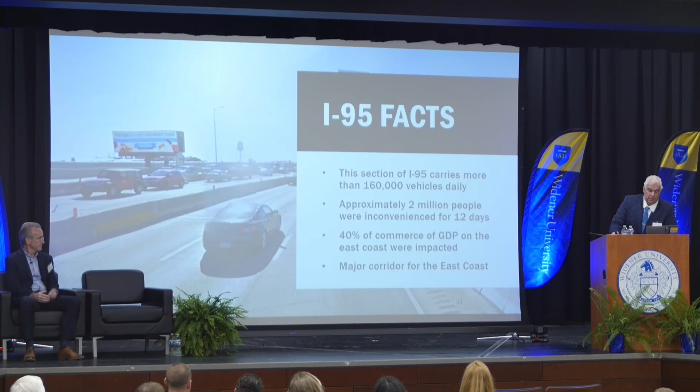So we'll move on to what we have going on. The fact is on I-95, the section we have carries about 160,000 cars a day. It's about 2 million people that were inconvenienced in the 12-day period, about 40%, and that's a sliding scale on the GDP going up the East Coast.

So the interesting part of this was Sunday morning, there was a fuel tanker, 8,500 gallons, lost control on the ramp on Cottman Avenue. Shortly after that, 4 lanes collapsed. I don't want to dwell upon this, but the tragic part of the thing was Nathan Moody, who was a truck driver in there, he did perish in there beyond repair and recognition.

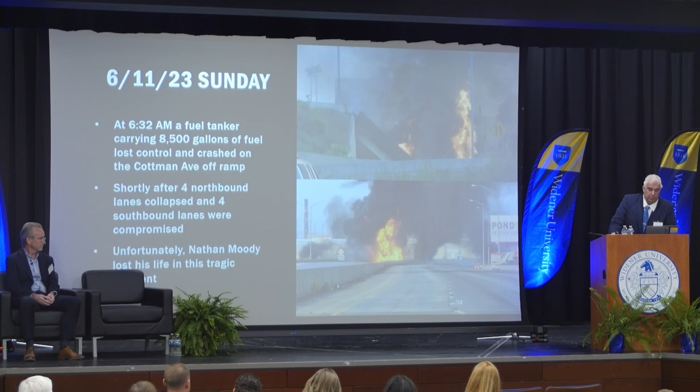I was there right after the fire was starting to settle down a little bit, and that's it. So it gives you an idea of the intensity of the flames that were there, and you couldn't even get near it. And the police department, of course, allowed me to get right in there and try to start figuring this thing out.

Some of the major concerns we had underneath Cottman Avenue, and this is really part of the risk of the job, there's water lines, there's pipes, there's utilities. We bid the job originally and we weren't sure the compressive strength of the material. So basically what we had, you had 8,500 gallons of gasoline that leaked into the sewers, and typically it wouldn't be a problem, but the Baxter water treatment plant actually has drinking water, and they still have combination sewers in Philadelphia, and it was back in the old days, dilution was a solution to pollution.

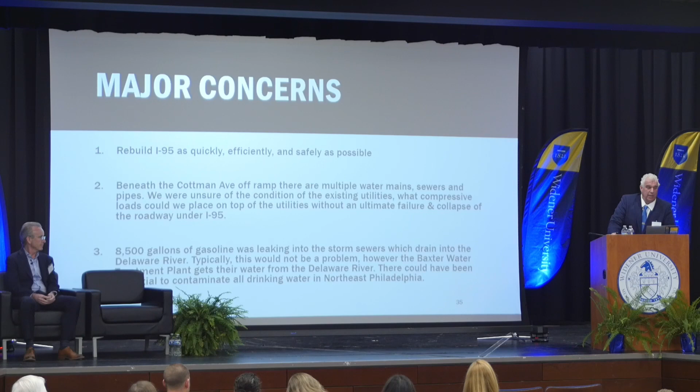That was the saying they always had, so you couldn't figure out what to do with it. Well, dilute it. Yeah, that's fine. Okay, that's great until 8,500 gallons runs out in the river and the drinking water was polluted. So that was some of the concerns we have. There's a few more there. You know, the box culvert, there's terracotta pipes, which is a clay pipe that won't take heat real well, plastic pipes that just straight melt and whatnot. Some of the other concerns we had for the engineers in the group, it was a 57 degree radius.

There was a radius of 3,000 feet, and the beauty of that was we had no drawings, we had no details, we had nothing on what we could have. So those were some of the concerns we had.

We weren't sure about the utilities, weren't sure about the box culvert. The bridge was 57 degrees, 37-degree radius. It's bifurcated, meaning one side is higher than the other. We had to reroute the SEPTA buses, and thank God Leslie Richards from SEPTA jumped in. This was a testament of American spirit where everyone pretty much jumped in.

So there we are, not sure what to do. At 7:45 we got a phone call, and Patty's seen this happen before. I immediately got up, drove to Philadelphia, and had a brief conversation.

Harold Windisch was supposed to be here today, but he ended up with cooties, so he canceled on me. Then Dina Bozzi, one of the other engineers, the structural engineer, had to cover for him, so that's how that worked. The dean was very complimentary the way she phrased it, but I'll tell you the truth.

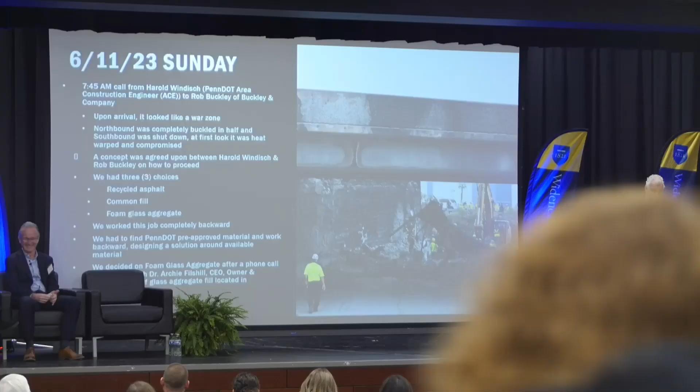So the discussion came up. We actually had a choice of three materials. It was recycled asphalt that we knew was in the area, or foam aggregate lightweight, which weighs about 20 pounds a cubic foot rather than 120, which would be your standard dirt. So that's the decision that was made.

We had everything figured out by about 9 o'clock in the morning. Archie, not having much of a life either, picked up the phone on Sunday morning and said here's what we can do.

So when we get to this, all you engineers pay attention. We had mechanical drawing, and Professor Coe would have a heart attack on the next picture. We had to roll our pencils, and computers weren't really good. We had key punch cards. We had to use Fortran 4, which was a huge waste of time, and Cobol, another waste of time language. But you can look it up in ancient history. You guys really get bored - I'm available in cassette or 8-track in case you can't sleep tonight.

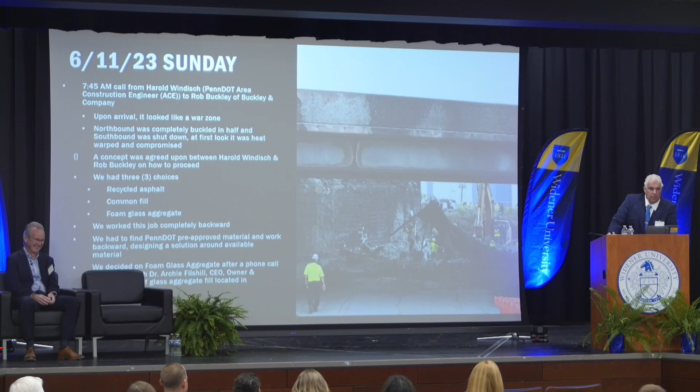We can really get technical with this, but we came up with a plan, and it had to be done quick, it had to be accurate, it had to be safe. So there it is - there was the plan.

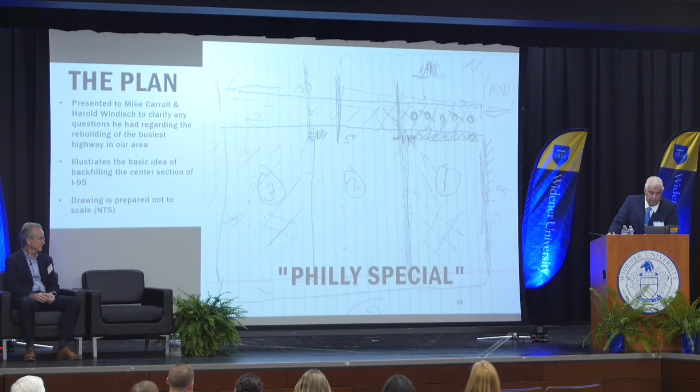I know what you're thinking now - it's one of my better drawings, I'll be honest. But that was done in the first hour of the decision, and I explained that to the Secretary of Transportation, Mike Carroll. One thing I have to note, it's a Philly special - kind of a football thing. I was lucky enough to be the quarterback on this team, so we dubbed it the Philly special. Just for the engineering teachers and professors, it's not to scale, in case there's any question - I just throw that in there.

Our solution, obviously, we had to detour, come up with a plan - safe, accurate, well thought out. 160,000 cars were affected. We also got a call from the emergency management team, the state police - Jerry McVeigh, Greg Reale, and the fire department, Tony Hudgens. They're all friends, we've worked with them for 30, 40 years, which always made it interesting. The Coast Guard jumped right on the boom to try to get the gasoline under control. We also backfilled the center part, temporary three lanes northbound, which we were allowed to restrict. And we used the lightweight material because of the compressive strength, which was the gamble.

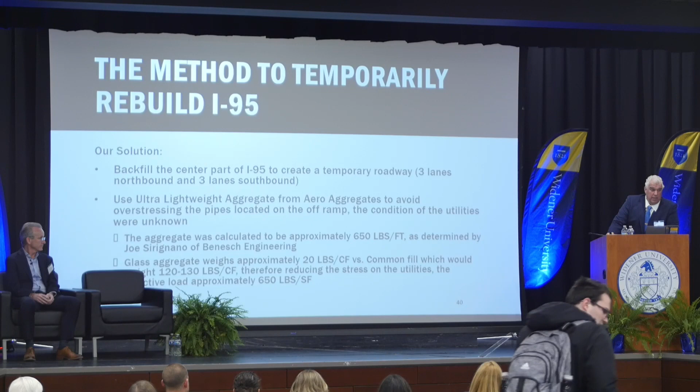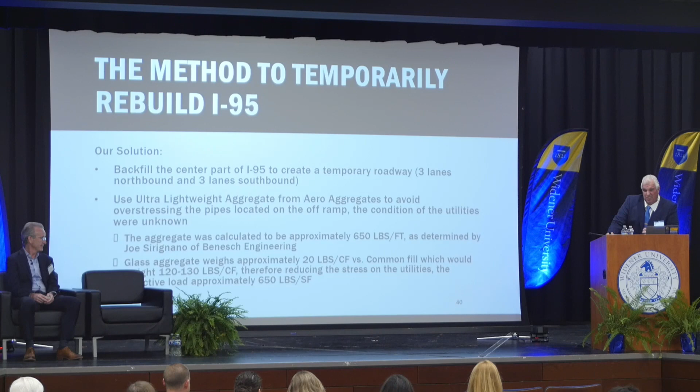Now here's the other part that's interesting. As a contractor, you have to be very careful when you go out there - of course you indemnify everyone and hold everyone harmless. If you haven't taken any business law classes, I strongly recommend you pay attention to that, and they'll explain what that means. But that's the risk you take when you take these jobs on. If it had not worked, I probably wouldn't be here - I'd be in jail. A couple short stints there, nothing really long, so it's really not bad. But anyway, that's another story.

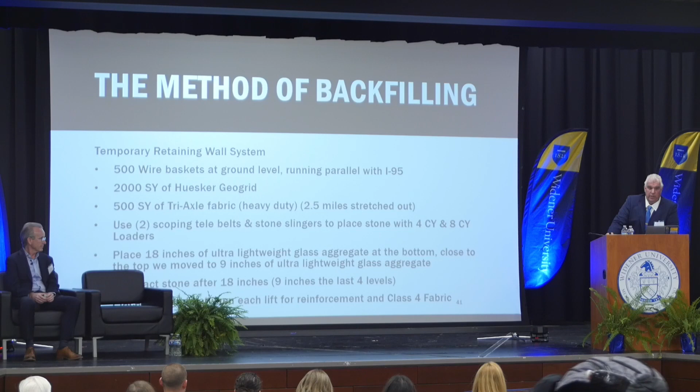Okay, we had some methods of backfilling. We used 500 wire baskets, 2,000 feet of high-strength fabric, which in total was about 2.5 miles. And thank God Archie was there because he took the obligation and responsibility on the design with Snobble Engineering. That was like a weight lifted off me tremendously, and I do appreciate that, because at that time you don't really know who your friends are until you get into those types of situations, and I was very fortunate - I cashed in a lot of favors. Sunday morning, you're telling the designers who usually tell us what to do.

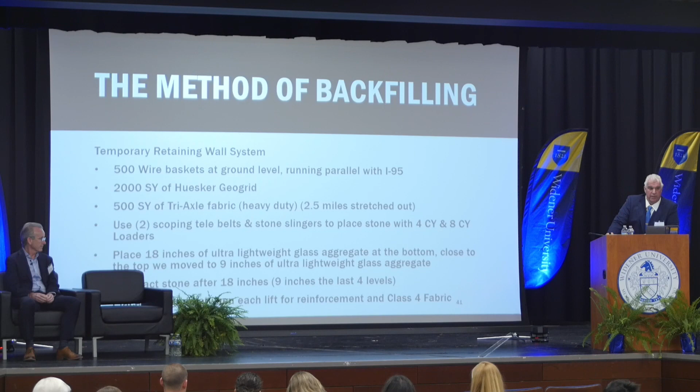By the way, I only need to design—take all the time you want, but you have till tomorrow morning or you're fired. So that's always fun as a contractor telling the engineer what to do.

At the time it was 8 o'clock in the morning, this is Sunday. This is a timeline of what was happening. By 9 o'clock we had a game plan with that wonderful design, and Abbonizio was on the project. Peter Abbonizio made a deal—he could take it down, it was half down anyway, so I figured it's not a big deal, let's see what he can do.

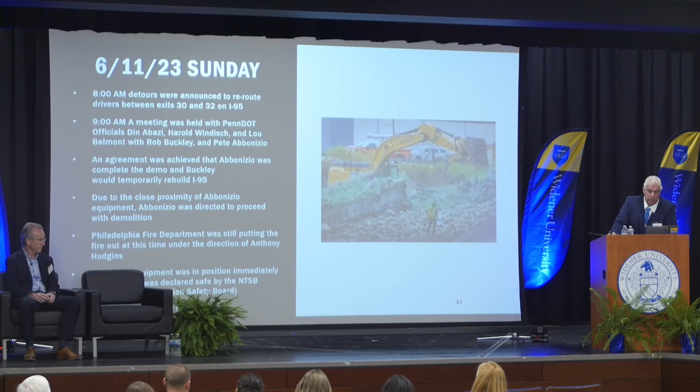So in 6 days he got it down and removed, and allowed us to coordinate on what we had to do. Monday morning, we have...

Governor Shapiro—I'll be honest, it was a very awkward conversation when he asked who I voted for. I tried to dance around it a little. I said, 'I voted for the winner.' He said, 'Bullshit, what did you do?' I said, 'Okay, well, I didn't vote for any of you, and I'm going to tell you why.' In retrospect, we became very good friends.

So now I call him Governor Superhero, not Shapiro. He's done everything, and they got it done as quick as they could. But he was saying it's going to take 3 months—the experts told him it would take 3 months. So we had a couple of discussions about that.

Mike Carroll is also the Secretary of Transportation. When I met Mike Carroll the first time, he banged on my window and said, 'I'm Mike Carroll, Secretary of Transportation.' I said, 'Mike, nice to meet you.' About a half hour later he came back, banged on the window again, and said, 'I'm Mike Carroll, Secretary of Transportation.' I said, 'Yeah, I heard you the first time, I'm not deaf.' But as it turns out, he became a real good friend.

He said, 'I'm not going to leave you.' Normally I'd say, I'll get with your photo op in a minute, thinking it's a photo op—but no, it was the real deal. He was very helpful, he didn't leave. So I have a lot of respect for those guys. They were with us the whole time on that project, and this is part of the political pressure we'll get into in a little bit.

The next day we also got a visit from Pete Buttigieg, and Secretary Shailen Bhatt, who's actually in charge of all the highway work across Pennsylvania, along with Mike Carroll, who also never left the site.

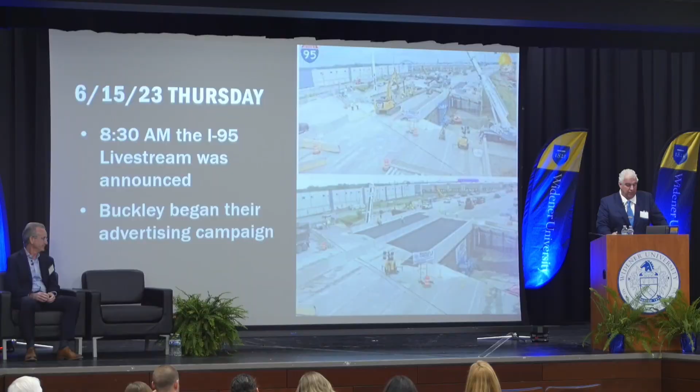Then around 8:30, he said we're going to have a livestream. What the hell's a livestream? We wanted no part of this. I'm thinking, my God, half my guys are criminals, half come from all different backgrounds—how are we going to put this up? I don't want them showing different body parts or doing things. So I said okay, he said we're going to do that, and I said alright, if you're going to do that, I'm going to put up a sign. That was our first campaign that we actually started—maybe you saw it, maybe you didn't, but it was a lot of fun.

I guess next we're going to get into Archie, and let's talk about some ultra lightweight fill and what actually happened during that period of time. Thanks, alright.

Thanks. So as you can probably tell, Rob's a really difficult guy to work with, get along with, and cooperate with. But I've had the pleasure before this project of working with Rob on a couple of projects.

Can you explain why 95 collapsed in the first place? Will you get to that? So he showed a picture. It was a tanker truck that came down Cottman Avenue full of 8,500 gallons of gasoline and couldn't make the turn, was going too fast, and hit the abutment and ignited. So the entire tanker truck lit on fire and literally melted the beams that were supporting northbound 95, and that's what caused the collapse.

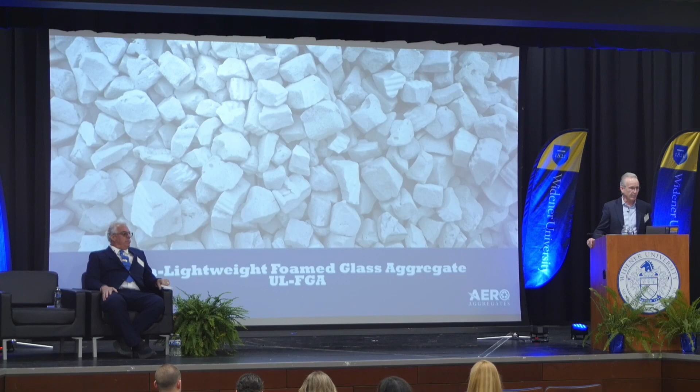What I would say was, when I first met Rob was right after we started Aero Aggregates, and I think what I learned about Rob even before 95 was someone that's always thinking outside the box. What's the easiest way, best way to skin a cat? What's the most optimal way to do it? So I had the benefit of working with Rob on Chestnut Street and on Montgomery Avenue, but like Rob said, I got a call probably around 8:30 in the morning from Rob saying, hey, we have an issue here. We think your material could be the way to go.

The double-edged sword for us was Governor Shapiro came out and made this announcement with Rob that we're going to use this brand new material, which was great in one respect that we got the recognition, but the downside was everybody thought this was the first time this product was ever going to be used, not knowing the history that it's been used in Europe for almost 30 years. And because they said it was recycled glass, a lot of the public thought we were going to stack up broken bottles and drive over it. As Rob knows, as Rob says many a time, they went to the experts at Wawa to ask them their opinion. And it was, you know, a lot of, I'm not going to drive on it first. So there was a lot of interesting PR before things got going.

So this is the material. It's an ultra lightweight aggregate. It's been in use mostly in Europe for about 30 plus years, and it's made all from 100% recycled glass. So at Aero, we take the glass that nobody wants, that would otherwise go to landfill. These are broken up bottles, mayonnaise jars, beer bottles. We crush it into a powder, convert it through a heating process, and expand it with air bubbles, closed cell bubbles. And we do it right down the road in Eddystone, right in the old Baldwin Locomotive Works, the first plant in the US.

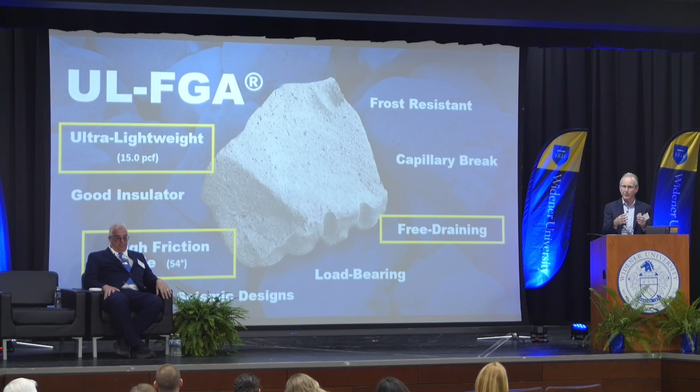But on the I-95 job, these were kind of the 3 properties that really came into play, and it's what we promote about the material, but all 3 of these came into play. Ultra lightweight because of the concern of those underground utilities, the free draining, the stormwater system where they were going to build the wall was going to be underneath the wall. So the wall itself had to be able to pass water through the wall to get down into the stormwater system. And then this high friction angle, which gave it the ability to stand almost vertical.

And then the other thing we talk about is the speed of installation. Normally when you're placing soils or fills, it's going in an 8-inch lift. You have to roll it, compact it. You need optimum weather - if it rains, you have to let it dry out, if it's too dry, you have to wet it. And with foam glass, it avoids all of that. It goes in 3 times thicker lift thickness and in any weather, even during torrential downpours.

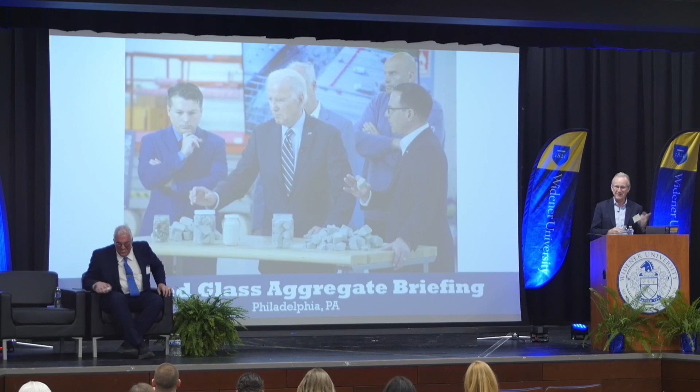As Rob said also, this did get international attention to the point that I got a call to attend a briefing with the governor and the president about what is this new material that we're going to put I-95 on. So I called Rob, we got a briefing. Rob said, you go, I'm not going, to make sure they don't come to the job site. I said, you don't want to meet the president? He says, no, not right now. He said, my fear is if the president shows up, the job's going to be shut down all day between Secret Service and security. I'm going to lose a whole day's production.

You go down, you do the talk, and just keep them off the job site. So I got to go down to a hangar at Philly Airport and give a brief overview of what the material is. This was not the first use. If you're from the region, we've got a lot of material under aprons at Philly Airport, the on-ramp at Girard Avenue. So there's a lot of local projects that have been in place for multiple years, but without anyone really knowing because no one really knew about the material.

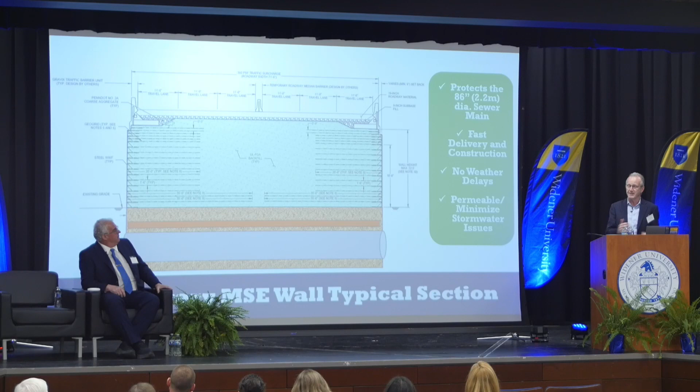So with that, part of Rob's loose leaf drawing, which was literally the drawing they used day one, we converted it into this. And when we heard about the job, we knew this was going to be the fix. We had just done something very similar at JFK Airport, not as an emergency, but as a temporary ramp with the same type of cross section.

So that's why I was able to say to Rob, what do you think? If you want, we can take this whole thing, we'll get the engineer that did this last job, we'll turn it around really quickly, and we'll take care of all the geosynthetics and everything else. And Rob had a lot of other things on his plate at the time, so he said, good, you take this. So that's how it got started.

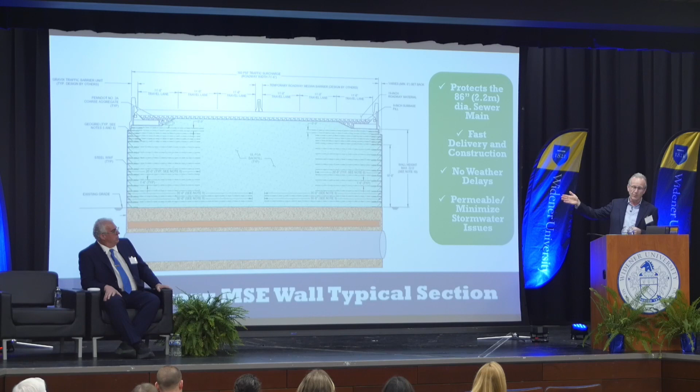And the idea was, we use a high-strength geogrid that you see here, so we can build the material vertical, and this is going to be the roadway for 95. The whole idea is that this 20 feet of fill was going to be 85% lighter than if they used regular fill to protect the sewer and the water line that was below it.

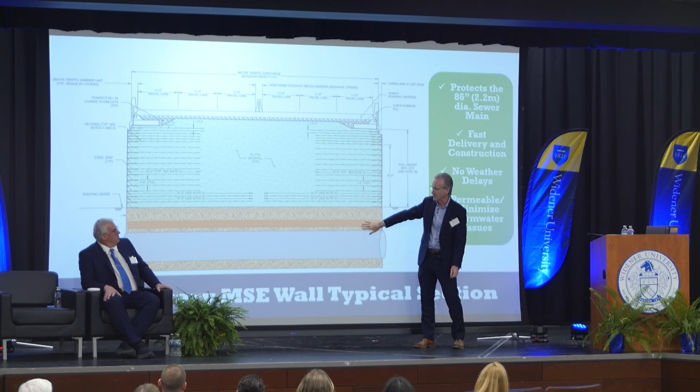The other benefit that we had, because the material is so lightweight, we can put almost 100 cubic yards in a tractor trailer without maxing out the weight of the truck, as opposed to a dump truck, which holds about 14 cubic yards.

So on this project, in these types of trucks - 95's closed because of the accident, so the Secretary of DOT asked Rob, what's your biggest concern is how are we going to get this aggregate from Eddystone to the job site because 95's closed? Well, with Rob's relationships, we got trooper escorts to escort our trucks up the soft shoulder to get to the job site. We were also able to show them that with 90 truckloads of the ultra lightweight, it replaced the equivalent of over 600 dump trucks trying to make the same route because of that added volume.

We also found this to be the best staging area we've ever had to drop off our material because it was literally on northbound 95.

The next part of this was, and Rob will get into the details of how he managed to do this, but we were working basically down in between the two bridge abutments to bring up the fill. And here you can see the layer of the geogrid being placed, which acts as the reinforcement.

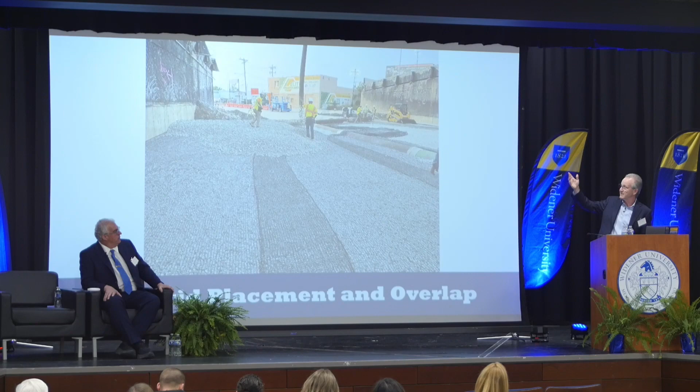So every 18 inches, we put a layer of reinforcement and build up the foam glass. And they use this, basically a concrete conveyor with a chute on it. Let me mute this so it doesn't go loud. But just to give you an idea.

So they were able to take the chute, and the material's light enough it could convey down, and they would place an 18-inch lift with the chute and then come back and compact that with a piece of equipment afterwards.

So the other thing that was kind of remarkable about this, from my viewpoint - I've been in the construction field as an engineer and as a contractor for over 30 years - and Rob touched upon, I'm sure he'll talk more about it, maybe the best example of cooperation and teamwork that I've ever seen on any project.

Everybody knew it was an emergency. Rob mobilized, I think you called in every chip you probably knew. Everybody chipped in, contractors that had nothing to do with the project, asking how can we help, what do you need? The welded wire baskets that we use, we borrowed from another contractor because we needed them immediately, and replaced them later.

When Rob tells you they talked about a 3 to 6 month time period to build this, the thing a lot of people miss is they talked about this being reconstructed in 12 days. 6 days was before Rob got there, done by the other contractor. The rebuild for our portion with the foam glass was done in 3 days, which sets a record for the amount of material placed and compacted. Of all the construction companies I've worked with, Rob, his brother Will, they worked 14, 16, 18 hours a day. If they weren't directing, they were working. Look at the pictures, Rob's on the plate tamper. He put the Secretary of DOT to work, saying 'grab some grid, pull it out.' Nobody was left sitting around not knowing what to do.

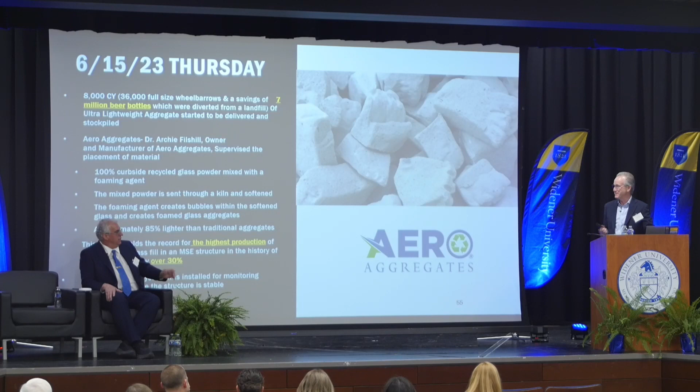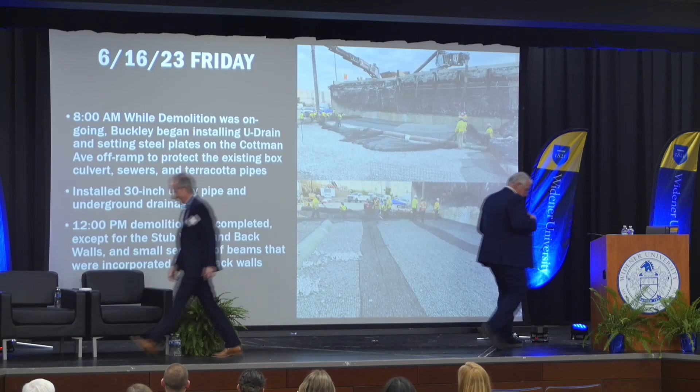Go ahead, I'll turn this back to you. No, I'll turn it back to you because you're going to get into Friday. Okay, here we go, my turn. Thank you. All right, that Archie's something else, that guy's as smooth as glass. I just figured I'd let you know. So anyway, we get into... well, he's not done. Don't clap, he's not done, but no.

And when we started placing it, my God did it rain. It just rained and rained and rained, never let up for a while. One thing we learned with Archie's material is it's actually 20 pounds to the cubic foot. You don't realize, there goes the material floating all over the place, and now they say the wall's failing. So we went down to Wawa and asked them, is the wall failing? Of course they said no, so we continued to place it. But putting this stuff in the rain is really one of the advantages we have, because we could have never gotten this otherwise. You're looking at soil density, compaction, and optimal moisture, always playing with is it too wet, is it too dry. You don't have the room, you don't have that with this material.

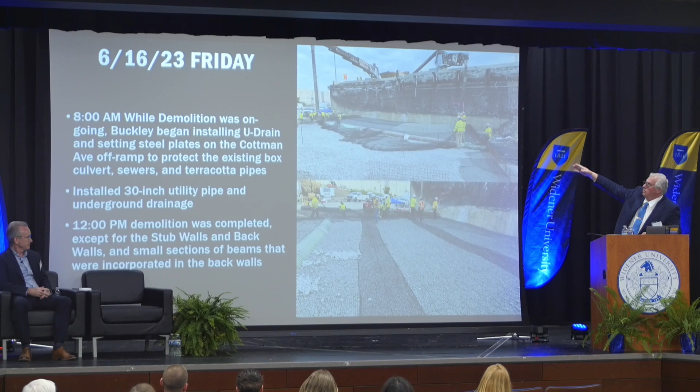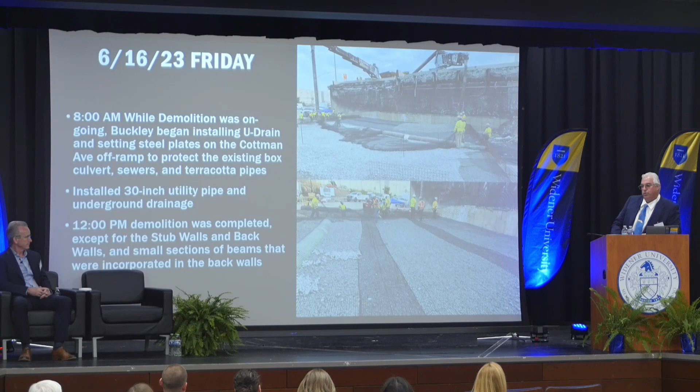It's hard to see in this picture, but you can see it's 57 degrees skewed. We weren't sure of the condition of the abutments. They were burnt, so we were trying to take cores as we went up. We weren't sure if they were going to fail. We had to get the line right, with this skew, when you're on a radius, we narrowed up the lanes to 11 foot, so we weren't even sure if we got the geometry right. And we did this with a 40-year-old theodolite and string lines. So a lot of it had to do just with experience on what we had over the years. We didn't have GPS, we didn't have any of that, so it's kind of good that coming through the ranks, we weren't really given all these things, and that's what kind of made us successful, plus our connections.

Speaking of President Biden, he did come with Governor Shapiro, superhero there, and they're flying around in a helicopter, and he said this is the most important job in the U.S. today. So there was no pressure there, and Archie, like he said, he went down there.

I did tell him not to come because I was worried about momentum on these jobs. You're telling your guys, hey, you're not going to get lunch, you're not going to get dinner, you're not going home, you're not going to Little League, so you're all fired. So now all of a sudden we're going to stop, and that was a concern, because I don't know if you've ever seen this - they come in with 18, 20 people with Uzis and all kinds of crazy guns, and they just throw you out. You can stop and come back when we're done.

So I had no disrespect to the president, but we had a job to do, and I was more worried about getting it open because you're inconveniencing every business and every person up and down the East Coast at that point in time.

Here we go, and we're in full production here, and what we were able to do is we took concrete conveyors and we kind of converted them. At that time we were in full production. We were cutting baskets, we had an assembly line, we were sticking the baskets in. We actually used elephant trunks for the concrete because the chute wouldn't make the bottom, and it was short. But the material was so light, we were able to use the elephant trunk and place it a lot closer than you would normally.

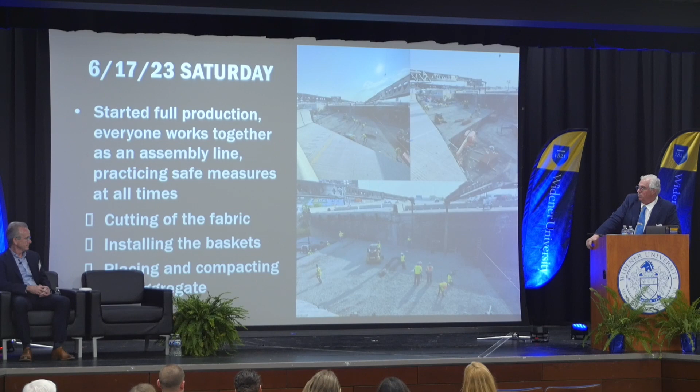But we shot it up on the main, and we were able to overcome, adapt, improvise - it's one thing you have to do in our world. You have to do it quickly, safely, and at all times keep it moving.

About 8 o'clock Saturday, about three-quarters of the way up, at that time we were in full production. You could see the problems we were going to have over here. Because of the skew, we had to cut back for the barrier - there's pictures of that showing later. But the stub walls on the demolition were not removed, and we had to get that done. We weren't sure of the abutments. We had that spaghetti hanging out, the meatballs - gives you an idea of what's hanging down there.

Gives you the compaction tools, which Archie's supervising, and we appreciate that because the inspectors weren't really sure of this material. And there were some anxious moments there.

And Archie went down to the Wawa. I'm not sure he was there for advice or whatever, but maybe to get a hoagie. I don't know - there's a wild idea.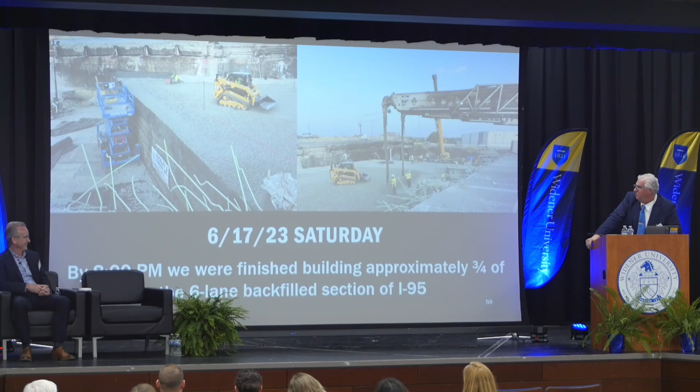This gives you an idea right through Father's Day. We worked through there, and I was real proud of our people. I have 150 people that I work with on a daily basis from Buckley and Company. We're really proud of what they did. Office staff, everyone was involved in this operation. We provided them breakfast, lunch, and dinner. There was no lunch break, nothing. That worked right through, and that was it.

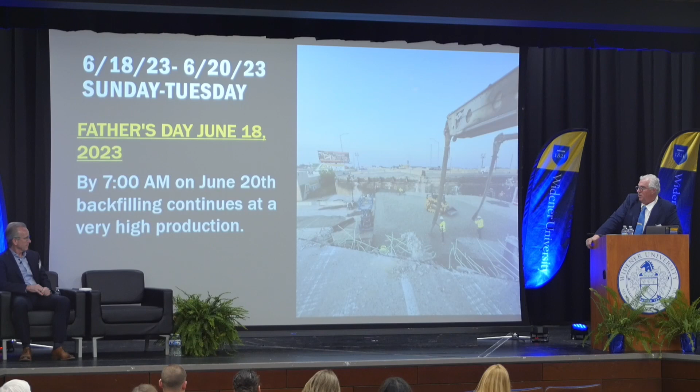The only way I can describe it, if you get involved in this, it is hell. You're up for hours and hours nonstop, and you get delirious, and you have to be careful. No one gets hurt. No one got hurt.

There's another interesting thing. We used this product, never used it before. That's a moment slab. One downside to the product is it's so light, you really can't form anything. So what we were able to do is PennDOT had a project with another company that they were sending it to, so we went up there and we stole those things off another company. The moment slab, that's the area on the bottom for the overturn. There's no way to pin the barrier down, and then that way there's slide and all the particulars. I can get into it if you can't sleep tonight, but for argument's sake, you're actually using that lower area as a moment slab, a bending moment on the up parapet, so you had to have the parapet and it had to line up.

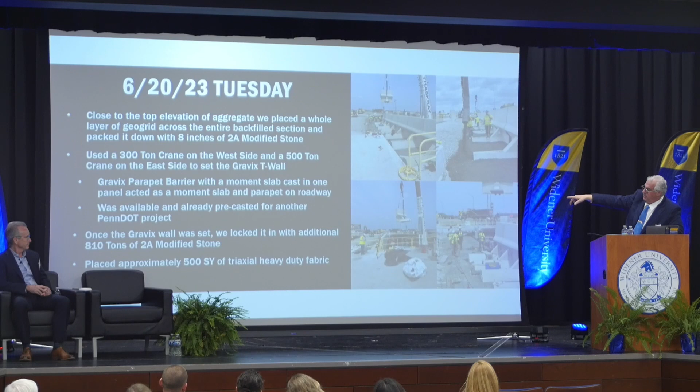So we had to make that fit in there, and we were taking 500-ton cranes, passing it across to 300-ton cranes because we couldn't get around the block.

So this gives you an idea what your bifurcated barrier is, Faddis, a company - this was when we knew we had the job right here. Bifurcated barrier, or asymmetrical barrier, means they're not symmetrical left to right. There's about 6 to 8 inches difference. If you can see the arrows there, one side of the parapet, that thing's called a median centerline barrier. If I would have used precast, it would have been too wide, and we would only have had 2 lanes going in there.

When I called the Faddis company, Bob Hess, who was very helpful from Faddis, he said, we sold the company to a Canadian group. That's fantastic, that's just what I want to hear. I got an emergency on my hands. I got to talk to the Canadians about trying to get stuff cast and made here in Philadelphia. So what do you think they told me? Good luck. So anyway, they went ahead and they went around their Canadian people. They bucked them and they made the forms for me, and they cast those. That was designed, fabricated, built, and placed within 4 days. So that's the kind of cooperation you need on these jobs.

Now, one of the things you have to remember is we built this completely ass backward. We kind of used material that we had available, and then we designed what we were going to do while we were building it. So that was kind of the cool part, but we knew it would work, and we were using pre-approved material.

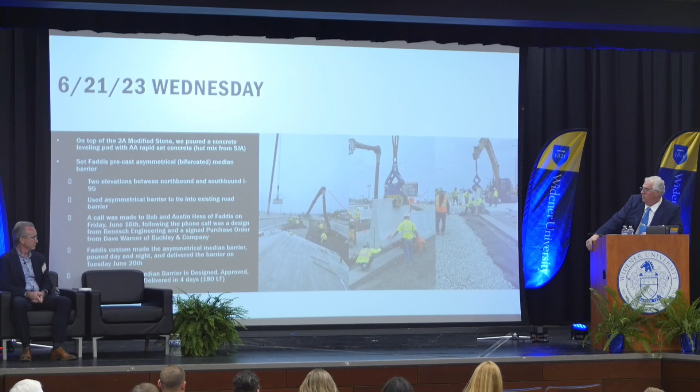So one of the real keys to it was this barrier right here, and I can't tell you how long it would take to form an asymmetrical barrier with 2 sides. What we figured is they worked 24 hours a day casting this, a few pieces at a time. We only had time to build 3 forms, and we cycled it as quick as we could all the way through. That's basically one of the keys to the job. We knew we had it at that point.

So now we're into Wednesday, and we caught a rain delay right off the bat. The interesting part, it's actually PM, not AM. The rain delay started at 6 o'clock. The interesting part was, that night, the Phillies actually canceled. For some reason, I don't know why or how, when we were here it missed us a little bit, but it did not rain. Now, when you place asphalt, it has to be a certain temperature. We put 2 lifts in, and it has to be less than 500 degrees. The base ran into 5-inch lifts. It has to cool before you put your top on, basically 100 degrees or less when you place it.

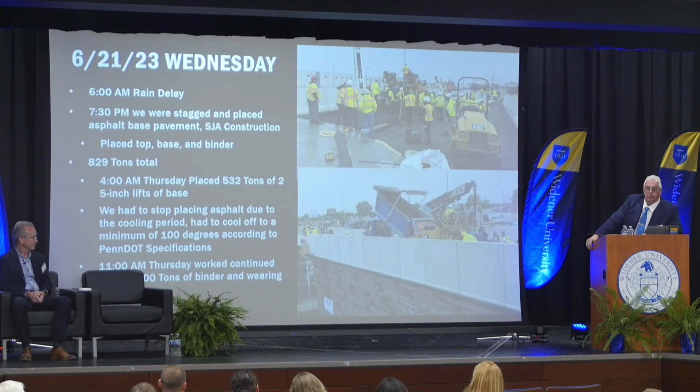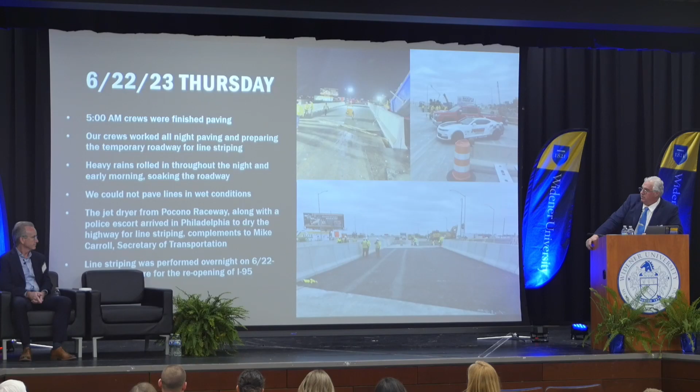So as we went on, with the rain, after we finished at 5 a.m. the first night, it came down and it rained. Mike Carroll came up with the idea - he says, well, we can get the racetrack. I'm a big race fan, up at Pocono 500, and this is kind of cooperation.

We actually took a jet dryer on the back of that and dried the lines so we could put the stripes on there and open the highway. I think what everyone misses is that the PennDOT people are always good at blocking traffic, so everyone did what they did best.

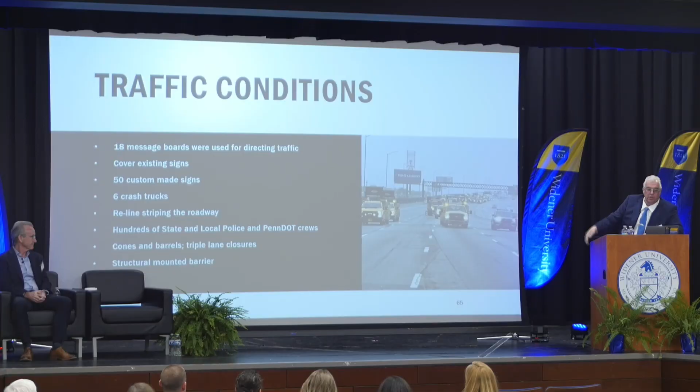Political pressure, I've never experienced any. As far as cooperation, I've never experienced so much from the top down, from the president down. The federal government was involved with Pete Buttigieg, the administrator, Governor Shapiro, Mike Carroll, and the building trades, which are tough. Here in Philadelphia, the building trades are a lot of fun to play with, and for 35 years old I look a little beat up, I guess. It's hard to believe, but we've gone through some battles with them, and it's always a thrill a minute. They come up with crazy ideas, crazier than mine. But anyway, I was lucky enough to be the quarterback on that.

We reopened the job on Friday the 23rd. We were actually done on Thursday, but with all the pomp and circumstance, we had to go an extra day, but we did have it open.

We became good friends with Governor Shapiro and our crew, and they had all kinds of pomp and circumstance. The Philly Fanatic and Swoop and everyone else was there.

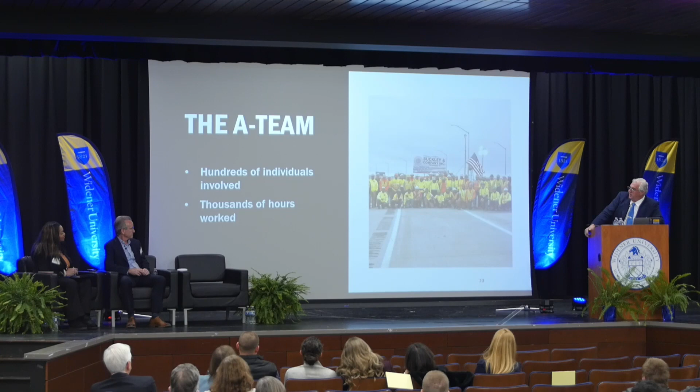That's part of the crew, not everybody that was involved, but that was in between shifts. One of the last days, some of the guys, girls, and ladies involved in that project. There's thousands and thousands of man hours, and I was lucky enough to be the quarterback there.

Sub-services: Thackeray Crane, Anderson, SJA, there's hundreds and hundreds of people involved in this. It just looks like a bunch of names on there. I don't want to bore you with it, but that's the kind of cooperation you need to pull these things off.

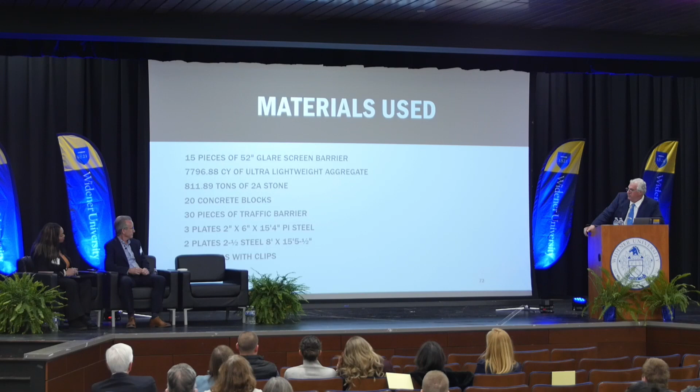Material used: barrier, aggregate, stone, blocks, Archie's material, affectionately known as the Golden Rocks. They had us on Philly Live too, I guess because the Phillies had a rain delay and canceled their game, so it was signs and what have you.

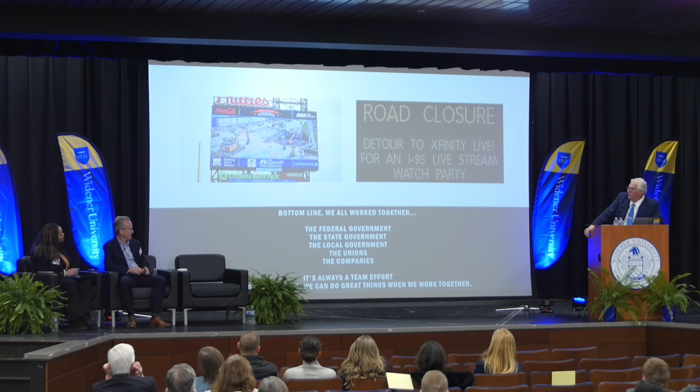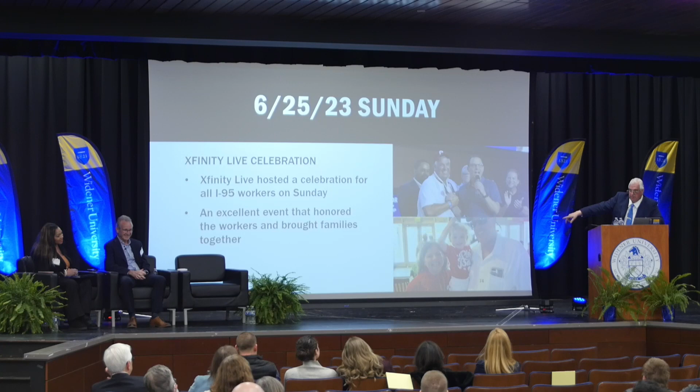It was a very proud moment, very proud moment. They threw us a party at Xfinity Live with Governor Shapiro there, and it was really an honor to be there. We have the 5th generation in the lower corner, the lovely Miss Patty Buckley, escorting me there. It was really a nice time, we've never really had that kind of cooperation or celebration ever.

Ongoing Monday, just to give you an idea, the project moves on. We also worked with the Pocono 500, giving them some advertising, and they gave us some free tickets, so we went up there for a race. We'll probably never be asked back, but it was nice to go one time. You know, my crew likes to party.

High Steel Day. Let me explain the steel. You talk about cooperation.

When we order steel, usually on the manufacturing process, it takes between 9 and 12 months, typically on a standard order, and this really wasn't a standard order.

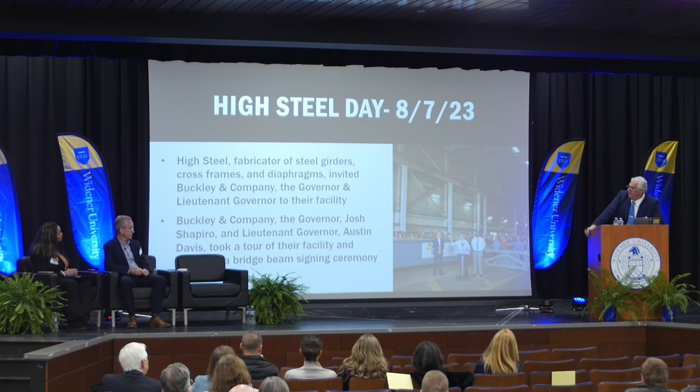High Steel out of Lancaster, Pennsylvania, a good ally, with the help of Josh Shapiro and Austin Davis, we were able to get that steel fabricated in 2 months. It's almost unheard of. That means you fabricate the plate, it's rolled in Coatesville, it's hauled to Lancaster, it's a welded plate section. It was designed, painted, and delivered in 2 months, which allowed us to put the permanent structure in: 16 girders, 56 members, and 48 diaphragms.

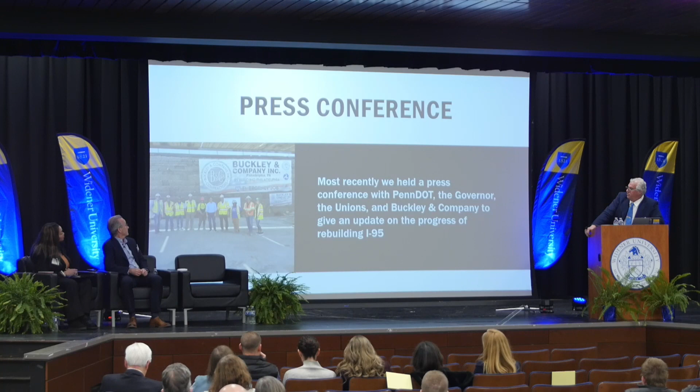And that's it. The most recent thing, we had the governor come down with the trade unions, and we had a little celebration again. Now, with that said, Archie, we have a little film here.

I'm not sure if this starts. It starts.

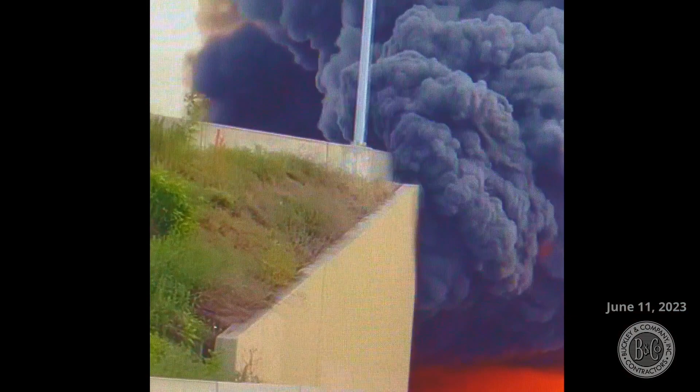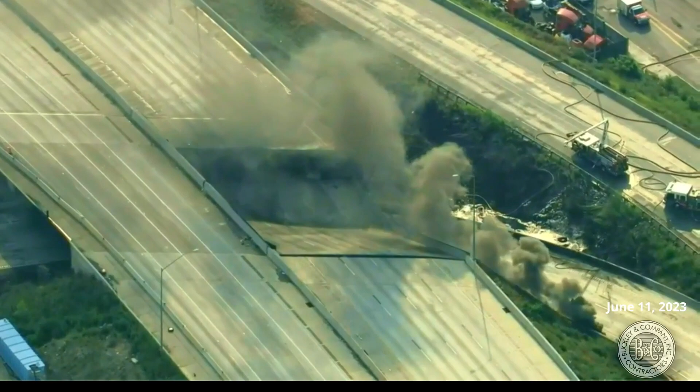At 6:32 a.m. on Sunday, June 11th, a fuel tanker carrying 8,500 gallons of fuel crashed on the Cottman Avenue off-ramp. This section of I-95 carries more than 160,000 vehicles daily. Approximately 2 million people were inconvenienced for 12 days. Almost 20% of commerce on the East Coast was impacted.

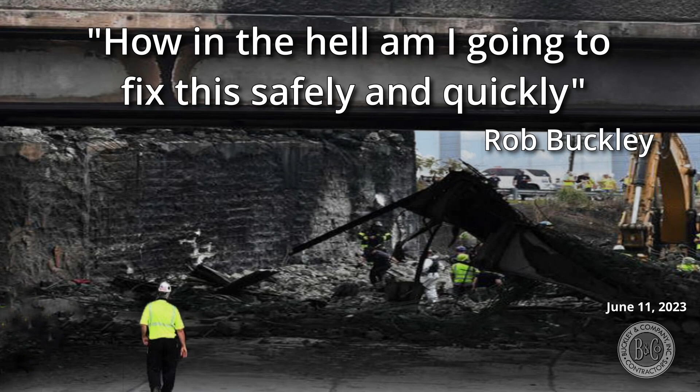That morning at 7:45 a.m., Rob Buckley received a call from Harold Windish, a PennDOT area construction engineer. Rob Buckley drew out a rough concept on a piece of paper. They decided on foam glass aggregate after a phone call at 9 a.m. with Archie Filshill, president, owner and manufacturer of glass aggregate fill located in Eddystone, PA.

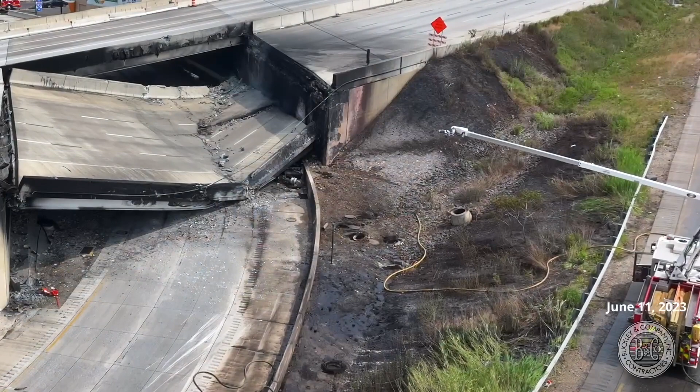At 8 a.m., detours were announced to reroute drivers between exits 30 and 32 on I-95. The Philadelphia Fire Department was still putting the fire out. Once the site was declared safe by the National Transportation Safety Board, at 12 p.m., demolition began.

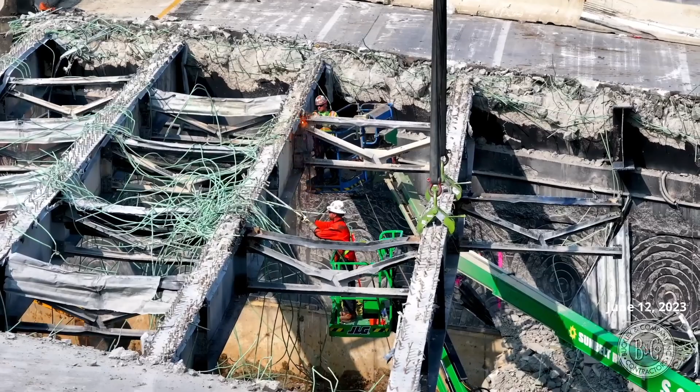On Monday, June 12th at 12 p.m., Governor Shapiro signed a proclamation of disaster emergency. At 6:45 p.m., the governor stated that the temporary rebuild would take approximately 3 months to complete.

On June 13th at 11 a.m., U.S. Transportation Secretary Pete Buttigieg, Administrator of the Federal Highway Administration Shailen Bhatt, and PennDOT Secretary Mike Carroll traveled to the site and assessed the damage as demolition was ongoing.

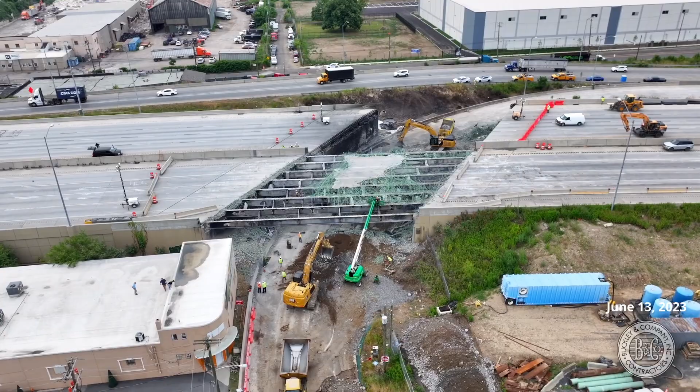On Wednesday, June the 14th at 11 a.m., Governor Shapiro, PennDOT Secretary Mike Carroll, Mayor Jim Kenney, and Ryan Boyer hired Buckley and Company to complete the project.

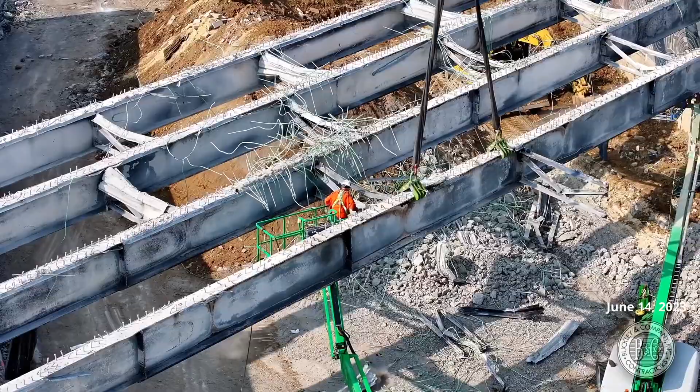On Thursday, June the 15th, 8,000 cubic yards, approximately 7 million glass bottles of ultra-lightweight aggregate started to be delivered and stockpiled. By 8 p.m. on June the 16th, Buckley and Company was ready to begin the rebuild.

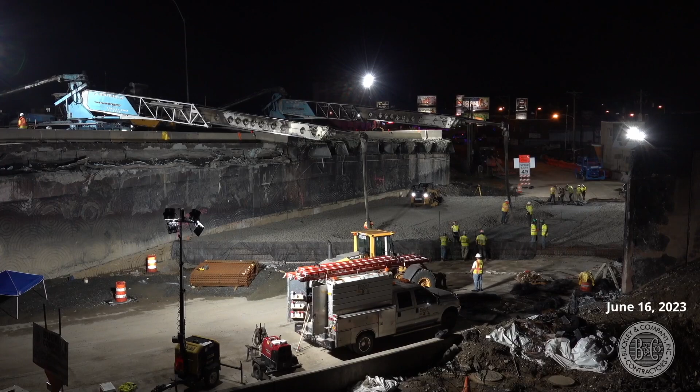Dr. Archie Filshill, owner and manufacturer of Aero Aggregates, supervised the placement of the material. This project holds the record for the highest production of placement of glass fill in the company's history.

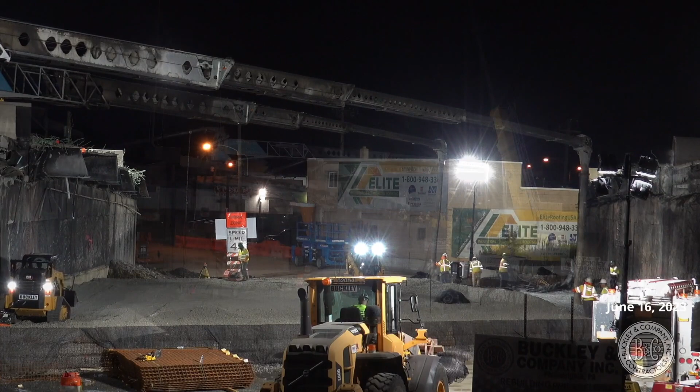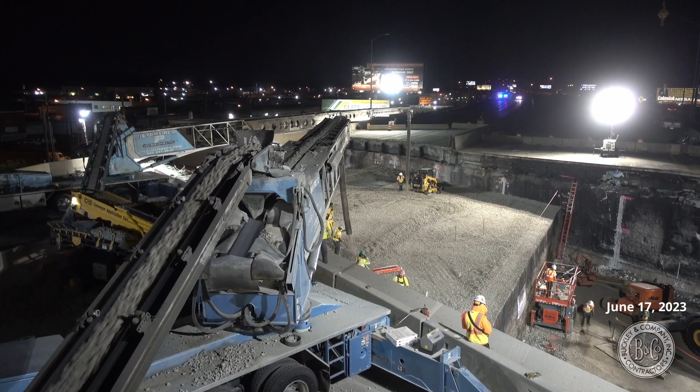Saturday, June the 17th, everyone was working together as an assembly line, practicing safe measures at all times: cutting of the fabric, installing the baskets, placing and compacting the aggregate. By that evening at 8 p.m., Buckley and Company had finished 3/4 of the 6-lane backfilled portion of Interstate 95.

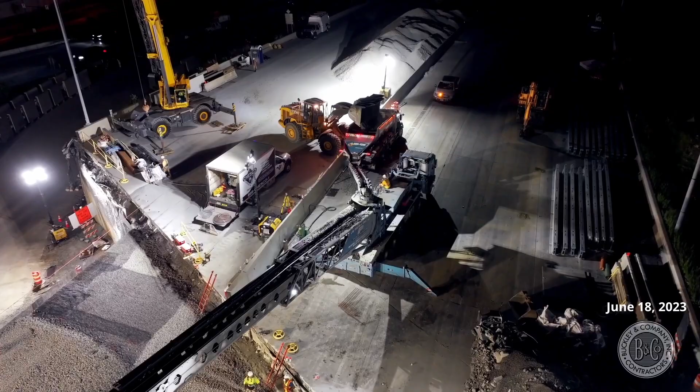President Joe Biden stated, 'This is the most important job in the United States today.' From Father's Day Sunday, June the 18th, work continued non-stop.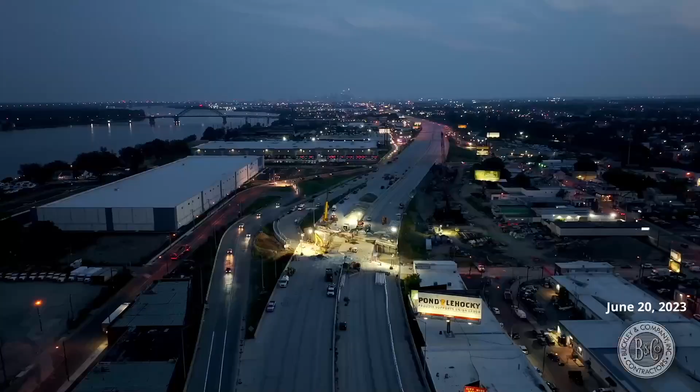By Tuesday, June the 20th at 7 a.m., we had completed the backfilling for the 6-lane Cottman Avenue, I-95 repair. We set the Gravix T-wall parapet barrier with a moment slab cast in one panel that acted as a moment slab and parapet on the roadway.

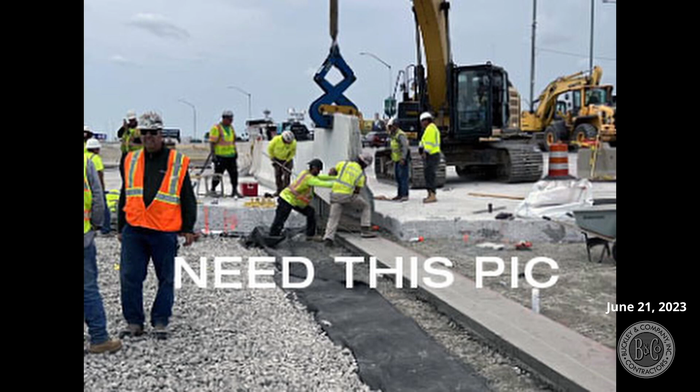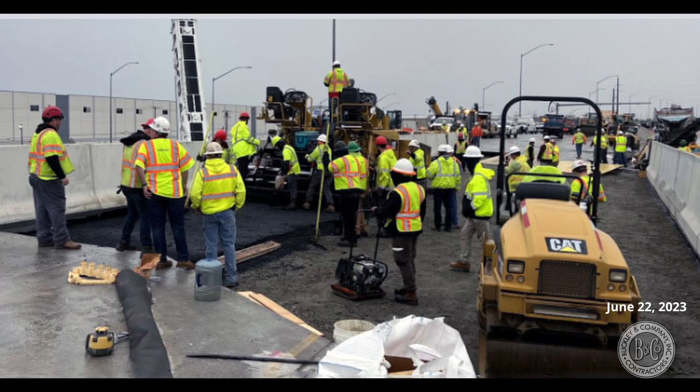At 7:30 p.m., June 21st, we were staged and placed asphalt base pavement, a total of 829 tons, and by 4 a.m. June the 22nd, crews were finished paving.

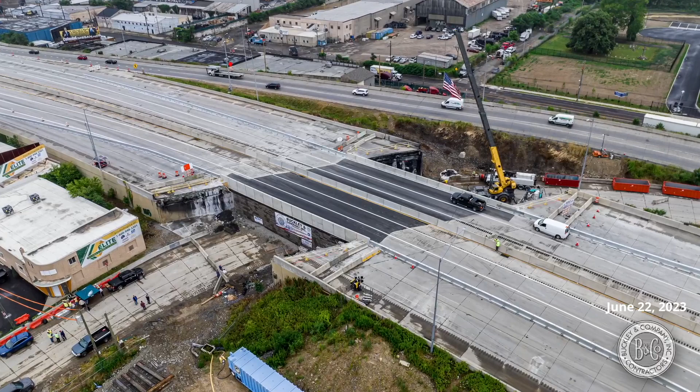Overnight heavy rains soaked the roadway. Pocono Raceway, compliments of Mike Carroll, Secretary of Transportation, provided a jet dryer to dry the highway to allow line striping that was performed on June 22nd and 23rd to prepare for the opening of Interstate 95.

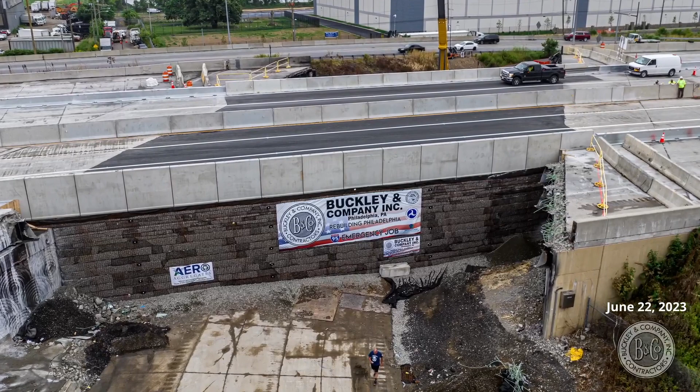Everyone has worked around the clock to get this done, and we have completed each phase of this project safely and way ahead of schedule. The experts that first day on Sunday told us it would take months to reopen I-95. We are now on track to open I-95 in just about 2 weeks after the collapse.